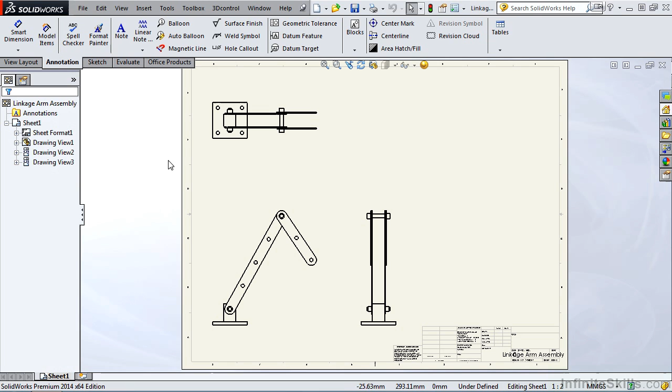In this video, we are going to look at some intermediate level bill of material options. I will be using the linkage arm assembly drawing located in the working files folder. I am going to begin by adding a bill of material just like we did in the earlier lesson. I'll select the annotation tab and then the drop down tables.

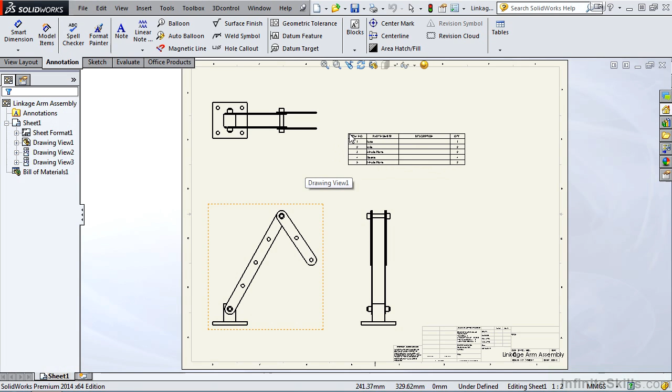Next, bill of materials. If you recall, I need to select a view to create the bill of material from, and then the property manager opens. I am going to go with the default options, so I will select the green check mark. Next, I'll go back to the screen and place the bill of material, and then we'll zoom in on the

bill of material. If you notice in the default bill of material, SOLIDWORKS places the component name into the part number column. If you would like to change this, all you need to do is to move the cursor above the bill of material. And when you move the cursor above the bill of material, we receive two blue bars, one on the left and one along the top. If I click these three arrows pointing to the left, it expands.

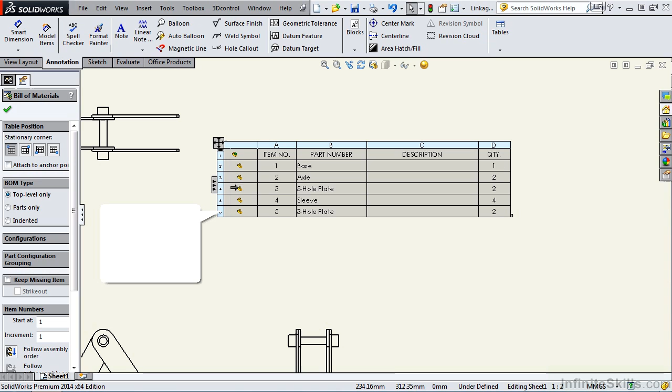And notice I have a part icon in front of each one of these parts. If I right mouse click on the part icon for base, a context sensitive menu appears. Next, I'll select Component Options. And you'll see in this menu here, the part number is base, which is the component name, or in other words, the document name. If you want to change that, select the drop down. We have two more options, Configuration Name or User Specified Name.

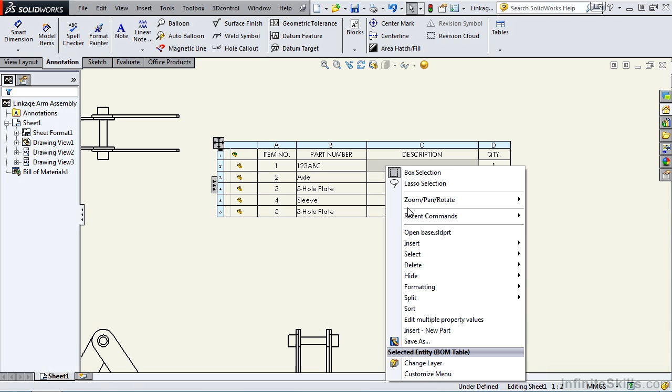I'll select User Specified Name and enter a part number of 123 ABC. I'll then select the green check mark and the part number is updated. Now, if you would like to add the word base, which is the component name, under the description column, you need to right mouse click and then open that part file. Select Open Base. The part file opens.

I'll then select the File drop-down menu and then Properties. A summary information dialog box appears and it has three tabs in it: Summary, Configuration Specific, and Custom. We are going to work in the Custom tab, and I am going to move down to the Property Name column and left mouse click one time. Select Description. I want the type to be text, but notice the options here: text, date, number, yes or no.

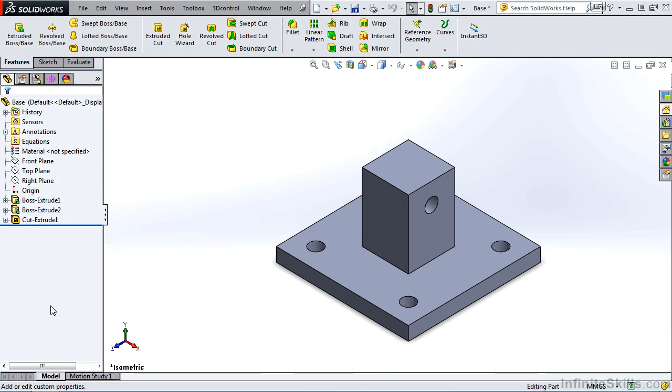And I want the value to be the name of the part, base. Select OK. Go back to the drawing. And notice the description is updated. Now let's take a look at adding a new column to the right of the description column. I am going to right mouse click in this blue bar and select Insert, Column Right.

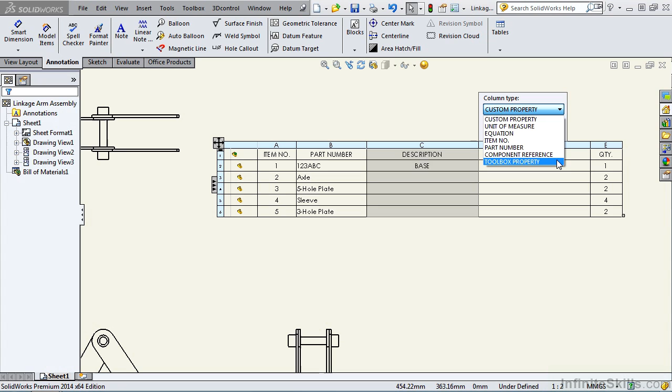We have a menu that appears, and you have several choices here: Custom Property, Unit of Measure, Equation, Item Number, Part Number, Component Reference, and Toolbox Property. Leave it at Custom Property. The property name I am going to select is Last Saved Date. The column populates. I would assume that this is not something you want to appear on the finished drawing. You probably want to hide this column.

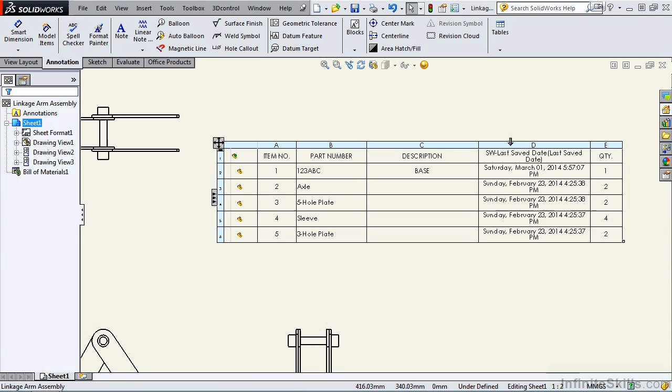So if we simply position our cursor above the column, left mouse click, we have an option for Hide Show. Once I select the Hide button, the column highlights, and as soon as I click outside of the bill of material, the column is hidden. Looking at this toolbar, we also have the options to justify the text, rotate the text, fit text, add equations, column properties, hide show, and we can change the header from top to bottom. Notice the bill of material update.

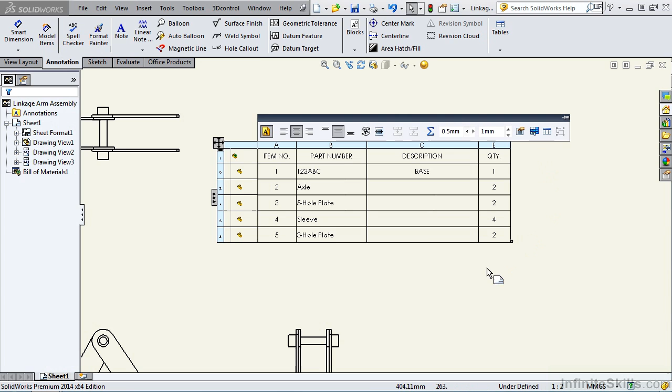Now let's take a look at how to exclude a component from the bill of material. Right mouse click on three-hole plate. I have the option Exclude from Bill of Material. I receive a message stating that the component will be excluded. And if you want to include this component in the bill of material at a later time, you need to right mouse click on the item in the Feature Manager tree to include it in the bill of material.

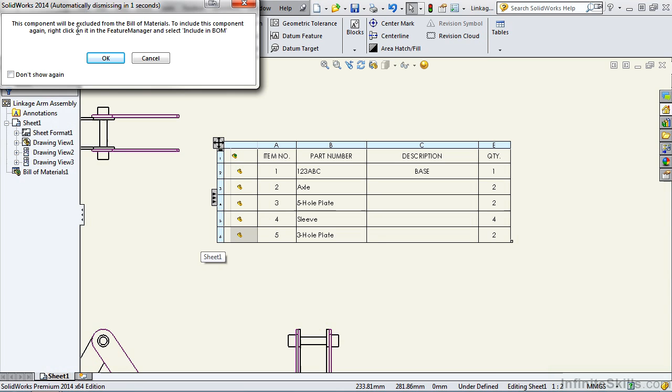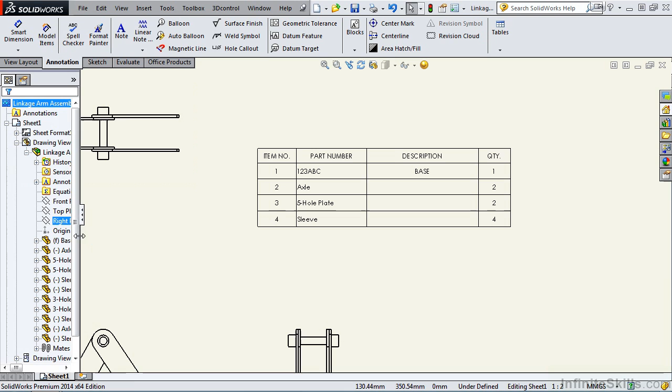Right mouse click, Exclude from Bill of Material, and select OK. Component number 5 is removed or excluded from the bill of material. Now, if we want to place it back in there, we just need to go to the Feature Manager tree, expand Drawing View 1, expand the linkage arm, go ahead and stretch this out a little bit. That item was a 3-hole plate. I'll right mouse click on the 3-hole plate and then select Include in Bill of Material. And it places it back in the bill of material.

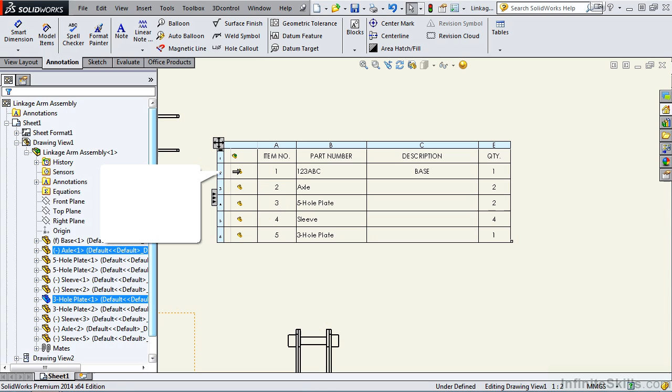Now, this next item you may have noticed already. When you expand the bill of material, if you position your cursor above any one of these components, you will get a preview of that component. Let's go ahead and size the Feature Manager down a little bit. Fit the drawing back to the screen.

If you move your cursor above the components and left mouse click, it highlights the components on the drawing sheet and in the Feature Manager tree. Notice how the components are being highlighted in the Feature Manager tree. Or if you select an item in the Feature Manager tree, it's highlighted in the bill of material. Notice this grayed area. So that is a handful of intermediate options for bill of materials.